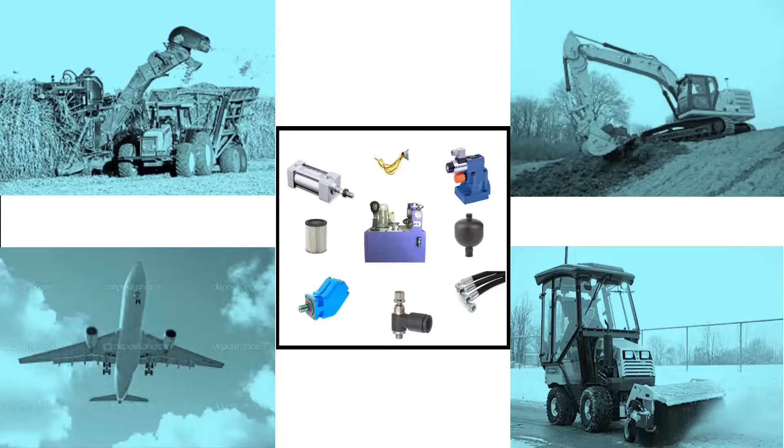Now we'll move on to the petroleum based fluid, mineral oils. It is the most commonly used hydraulic fluid and additives are an important ingredient in its makeup, giving petroleum oil characteristics which make it suitable for use with the hydraulic system. Basically, they possess most of the desirable characteristics. They are easily available and more economical. In addition, they offer the best lubrication ability, least corrosion problems, and are compatible with most seal materials.

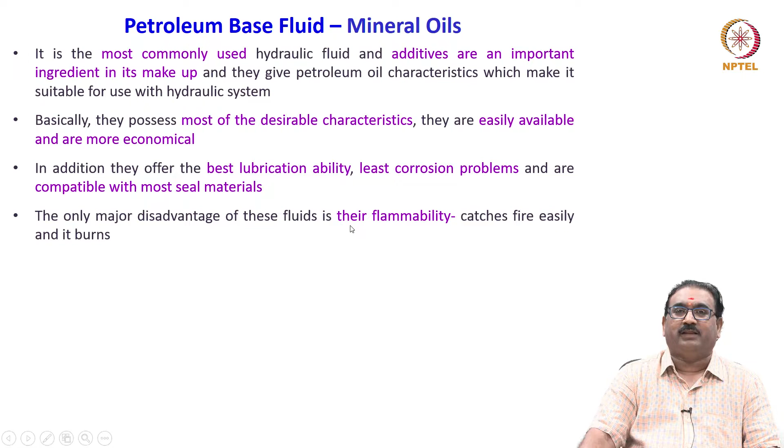The only major disadvantage of these fluids is their flammability, meaning it catches fire easily and burns out. They pose fire hazards mainly from leakages in high temperature environments. Petroleum based fluids are good for operating temperatures below 50 degree centigrade. At higher temperatures, these oils lose their chemical stability and form acids, varnishes, etc. All this leads to loss of lubrication characteristics, increased wear and tear, corrosion, and many other related problems.

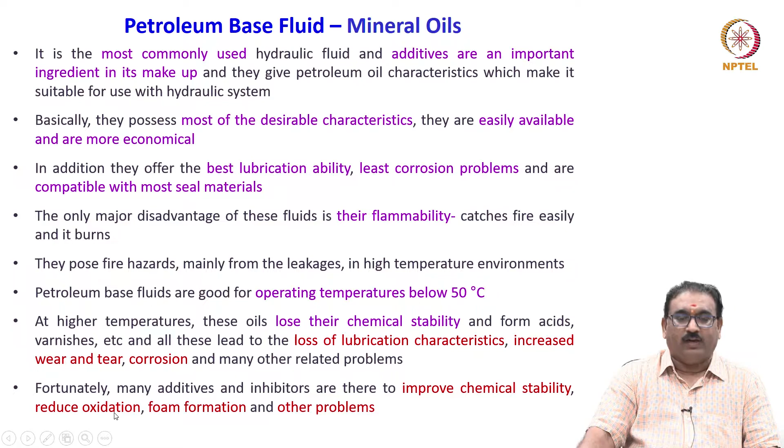Fortunately, many additives and inhibitors are there to improve the chemical stability, reduce oxidation, foam formation, and other problems.

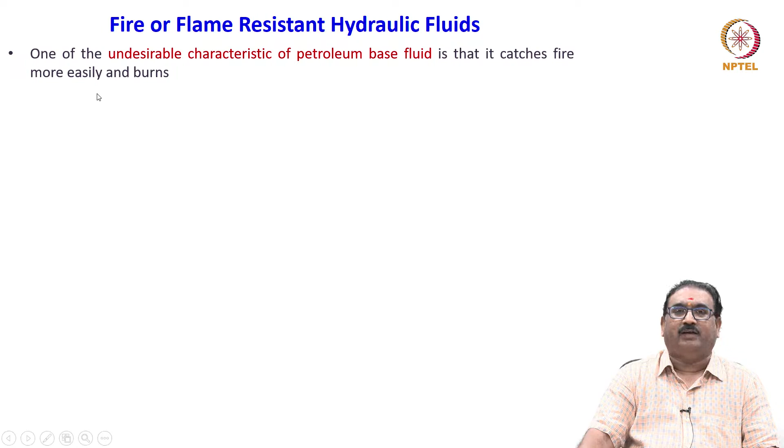Now, quickly we will see the fire or flame resistant hydraulic fluids. One of the undesirable characteristics of petroleum based fluid is that it catches fire more easily and burns. So an alternative fluid is fire resistant fluids. These fluids are high water content fluids, HWCF, and used when petroleum based hydraulic fluid may come in contact with a source of ignition or a flame or hot surface, as we have seen in machines like die casting, steel mills and presses.

These are specially formulated fluids that are more difficult to ignite and do not propagate a flame from an ignition source. Fire resistant should not be confused with fireproof, as fire resistant fluids will still ignite and burn given specific conditions. So they are designed to replace anti-wear mineral oil based hydraulic fluids.

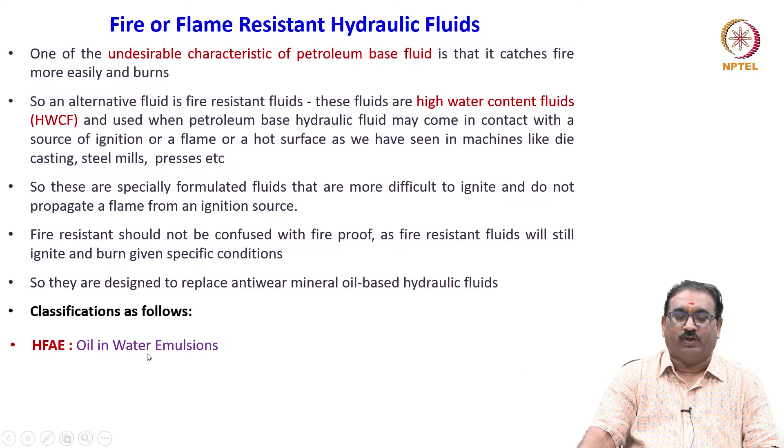Classification is as follows: HFAE, meaning oil in water emulsions. Water content is above 80% and is mixed with mineral oil or a soluble polyglycol based concentrate. So there is a risk of separation and microbe growth. Flame resistant can be used at temperatures between plus 5 degree centigrade to plus 55 degree centigrade.

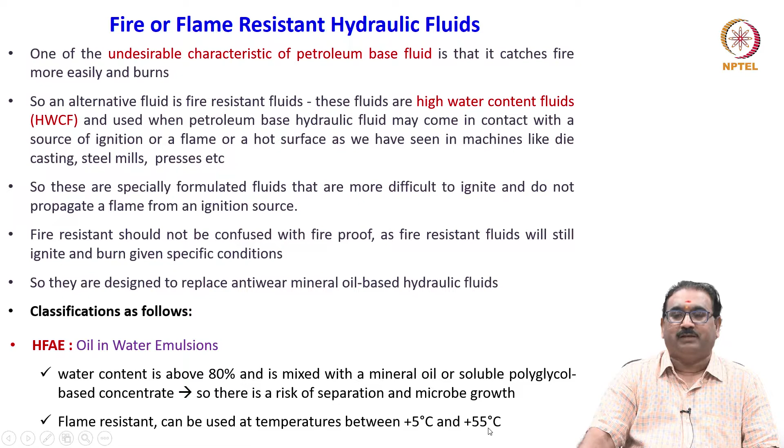HFAS, synthetic concentrates dissolved in water. No risk of separation since this is a true solution, which means the hydraulic components are considerably more susceptible to corrosion.

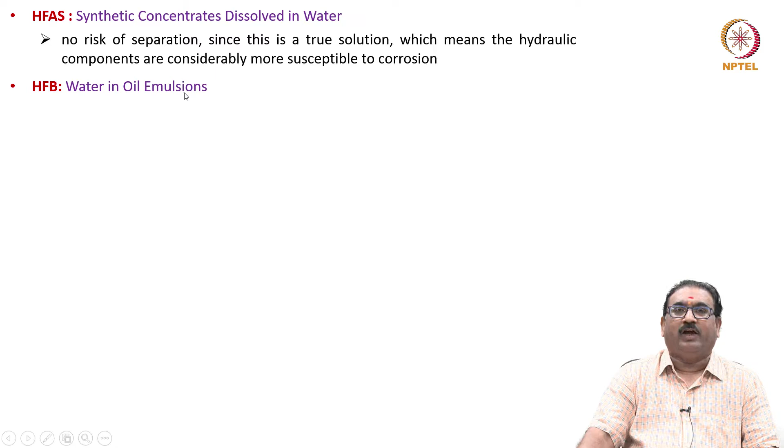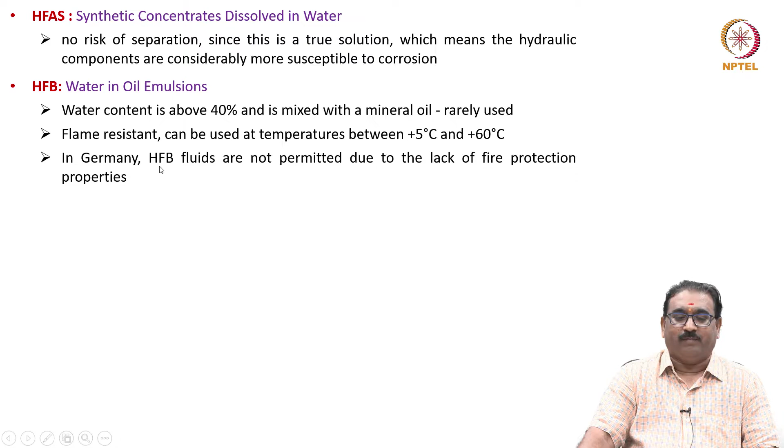HFB, the water in oil emulsions. Water content is above 40%, mixed with mineral oil, rarely used. This is flame resistant, can be used at a temperature between plus 5 degree centigrade to plus 60 degree centigrade. In Germany, HFB fluids are not permitted due to the lack of fire protection properties.

HFC, water glycols. Water content is more than 35% in a polymer solution. Flame resistant, can be used at a temperature between minus 20 degree centigrade to plus 60 degree centigrade. Can be used at a pressure of 250 bar.

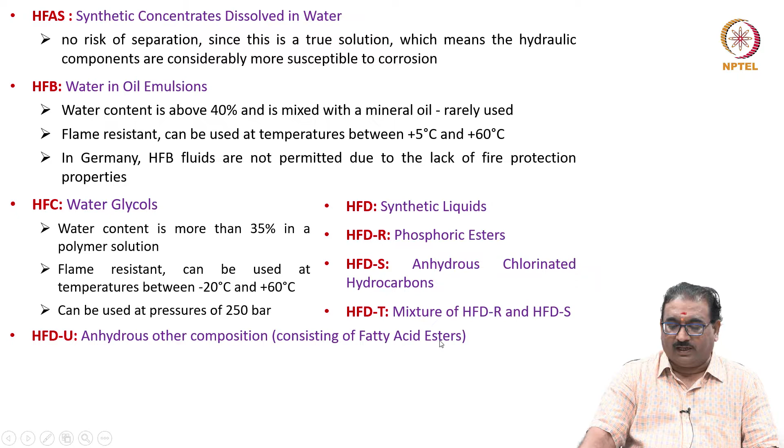HFD, synthetic liquids. HFDR, meaning phosphoric esters. HFDS, anhydrous chlorinated hydrocarbons. HFDT, mixture of HFDR and HFDS. HFDU, the anhydrous other composition consisting of fatty acid esters.

Synthetic liquids have a higher density than mineral oil or water, not HFDU. They can cause problems with the suction performance of pumps and affect a lot of gasket materials. Flame resistant can be used at a temperature between minus 20 to plus 150 degree centigrade.

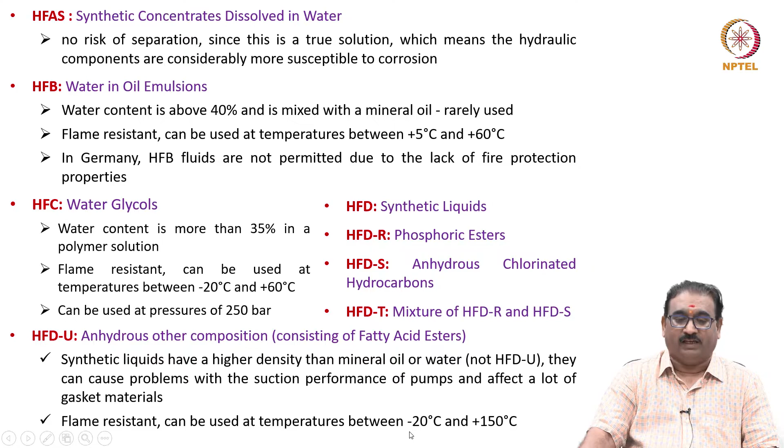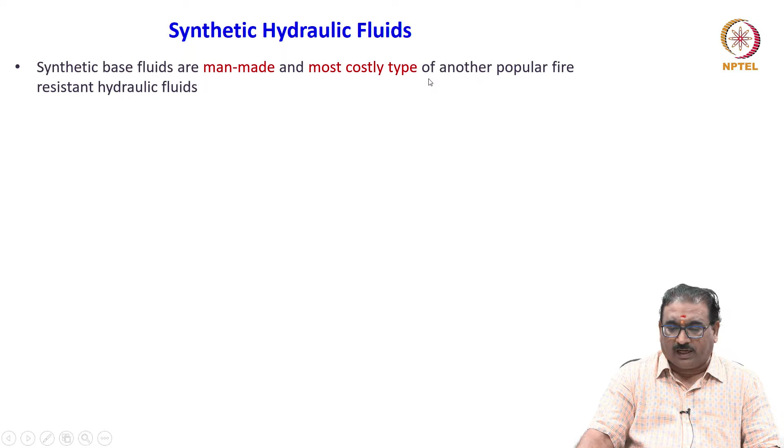Quickly we will see some of the synthetic fluids. Synthetic base fluids are man-made and the most costly type of another popular fire resistant hydraulic fluids. They usually consist of phosphate esters, chlorinated hydrocarbons, or a blend of the two along with petroleum fractions.

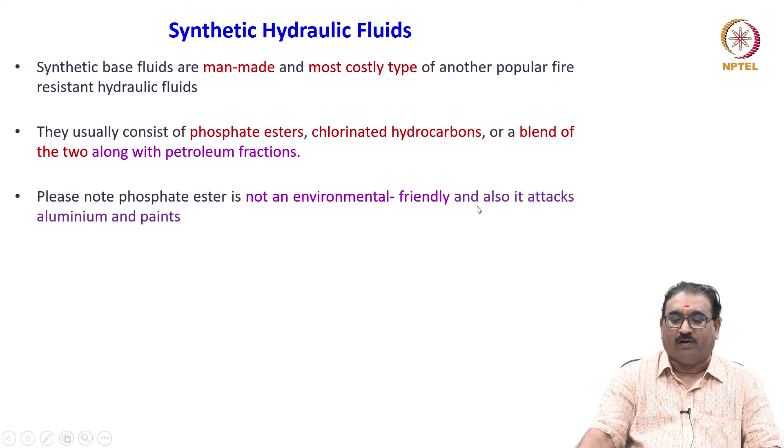Please note, phosphate ester is not environmentally friendly and also it attacks aluminum and paints. This type of synthetic fluid is more suitable for high temperature applications since it exhibits good viscosity and lubrication characteristics. It is not suitable for low temperature applications and not compatible with common sealing materials such as nitrile, requiring a seal made of special materials like Viton, which is an expensive material.

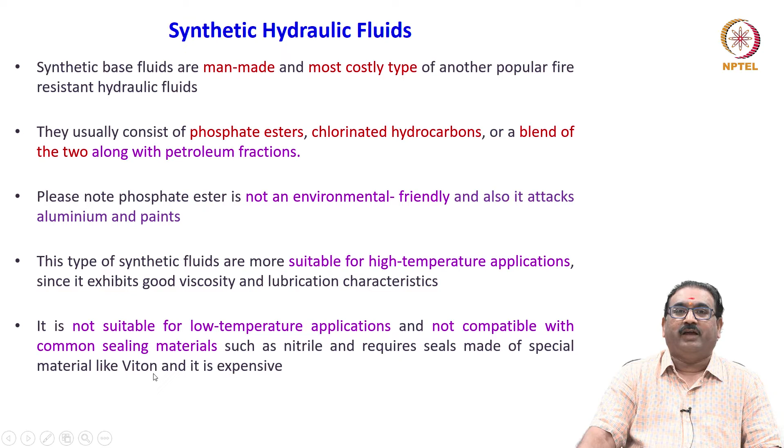Now we will see the biodegradable or bio-based hydraulic fluids. As more and more organizations are understanding their social responsibility, they are now turning towards eco-friendly fluids in their hydraulic machines. Hence, these biodegradable hydraulic fluids are non-toxic, biodegradable, ashless, anti-wear hydraulic fluids formulated using a readily renewable biobase.

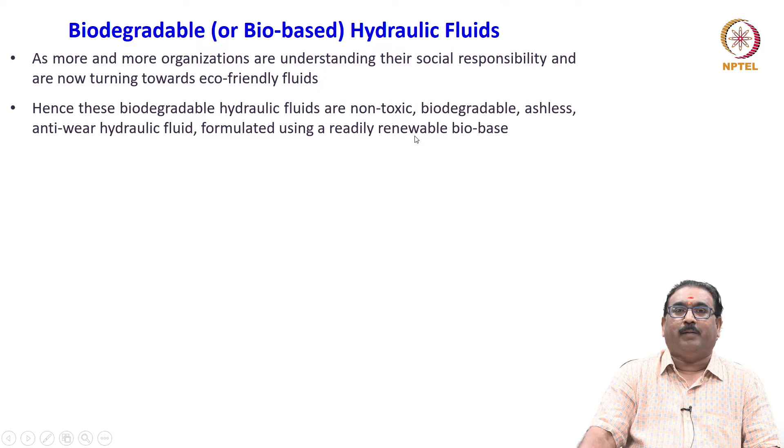Manufactured using plant oils, rapeseed oil, sunflower, soybean and many more, and used in biologically critical environments like construction machinery in water protection areas, snow grooming equipment in mountains, etc.

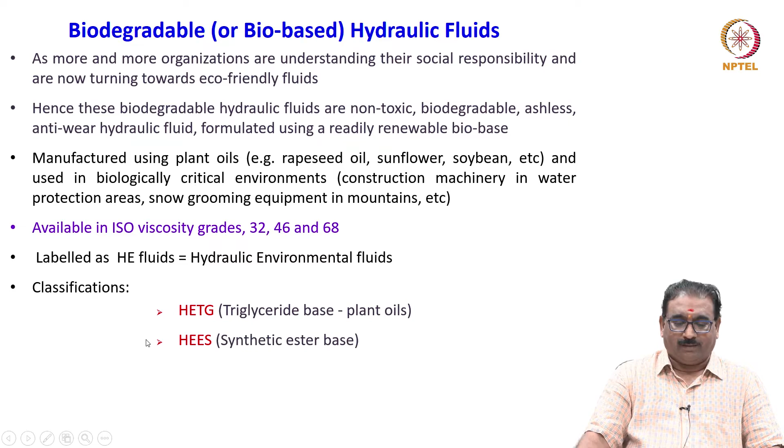Available in ISO viscosity grades 32, 46 and 68. Labeled as HE fluids, meaning hydraulic environmental fluids. Classification here: HETG, meaning triglyceride base plant oils; HEES, synthetic ester base; HEPG, polyglycol base; HEPR, other base liquids, primarily polyalpha olefins.

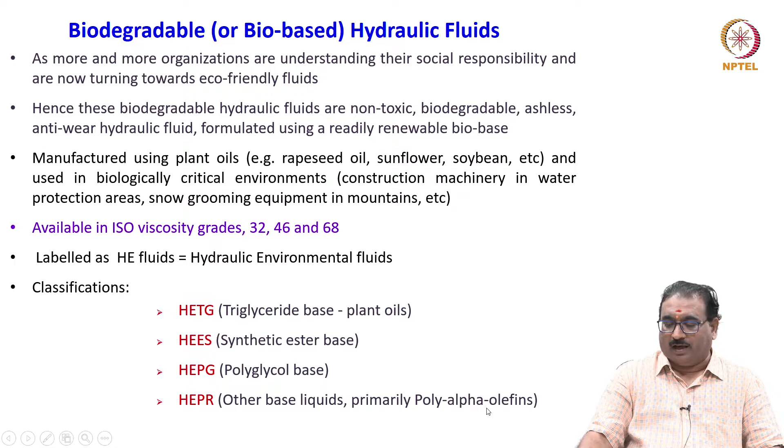Now we will see some factors influencing the selection of hydraulic fluids. Two factors are of primary importance in selecting a hydraulic fluid. First is compatibility with seal and bearings, very important it is. Second, the physical properties, primarily the viscosity. These are the two primary important properties while selecting the hydraulic fluids.

There are many more, I will list them all in the next slide, but you will see seal and seal materials are playing a major role. The table shows the different types of seal and bearing materials and fluid compatibility.

You will see here, I am showing the table here. There are different material and type, temperature range, fluid compatibility, because different types of fluids are there, as you have seen: air, petroleum based, water based, phosphate ester, many are there. And application also I have told you, seals and bearing materials.

You will see here, first material nitrile, elastomer it is, temperature range is -4 to 122 degree centigrade. Here air, petroleum based or water based, they are for the seals. Similarly, you will see fluorocarbon Viton, elastomer, -1 to 230, air, petroleum based, water based, then phosphate ester, seals. Like this you will see many are there.

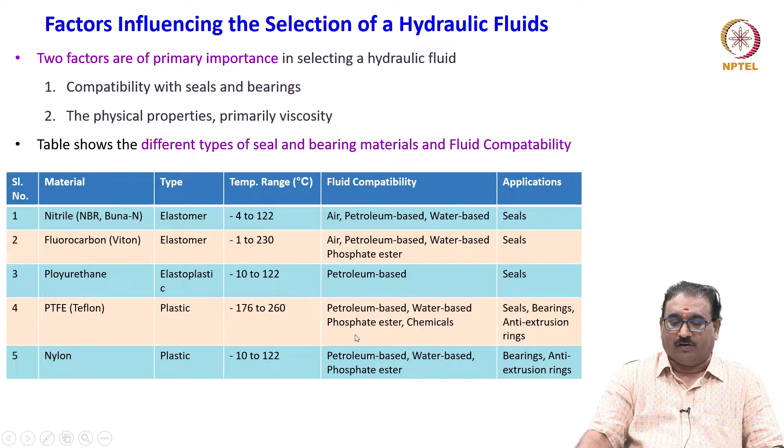For example, nylon, material type is plastic, -10 to 122, petroleum based, water based and phosphate ester. Here for the application for the bearings, anti-extrusion rings. This table will show you the different types of seal and bearing materials affecting the selection of fluid compatibility and temperature ranges.

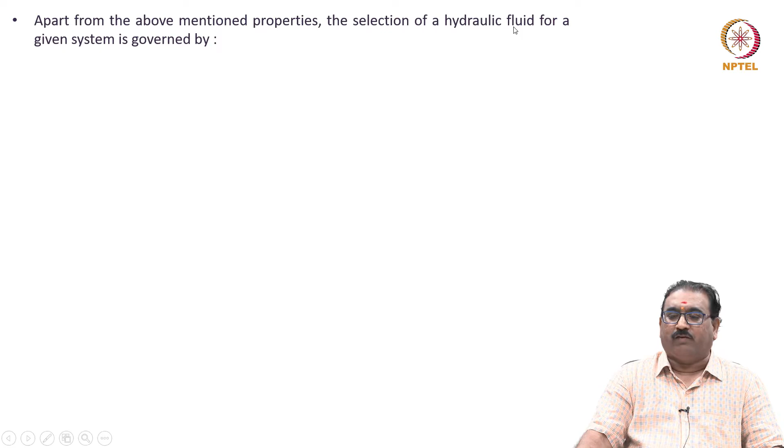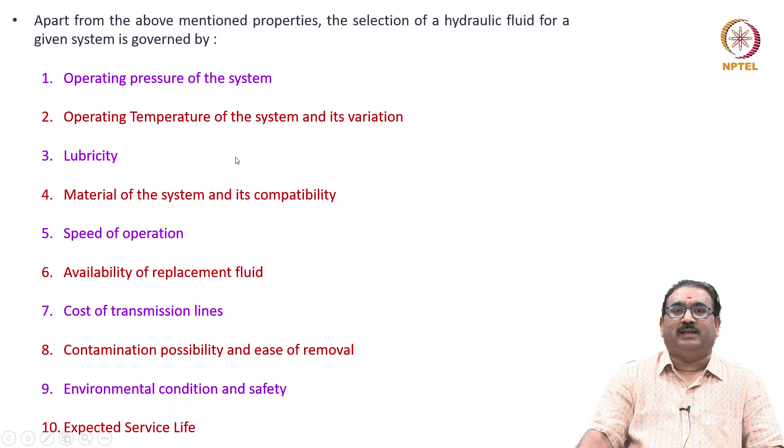Apart from the above mentioned two properties, the selection of hydraulic fluid for a given system is governed by operating pressure of the system, operating temperature of the system and its variation, lubricity, material of the system and its compatibility, speed of operation, availability of replacement fluids, cost of transmission lines, contamination possibility and ease of removal during maintenance work, environmental condition and safety issues, and expected service life. These are also very important while selecting hydraulic fluids for various applications.

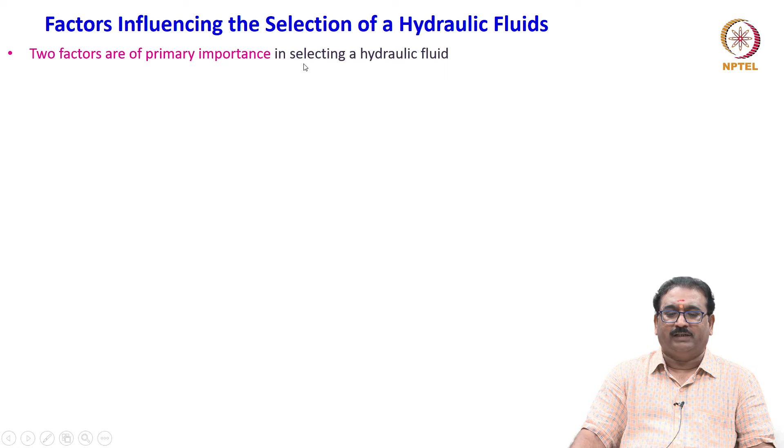Now let us see the factors influencing the selection of hydraulic fluids. Two factors are of primary importance, along with many other parameters. The first is compatibility with seals and bearings. The second is physical properties, primarily viscosity.

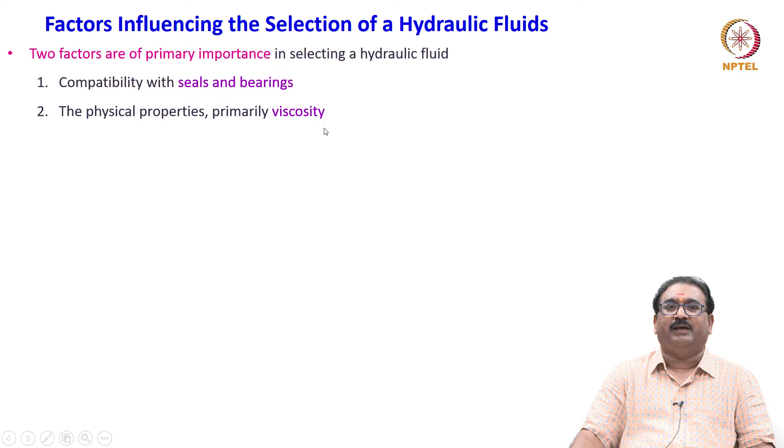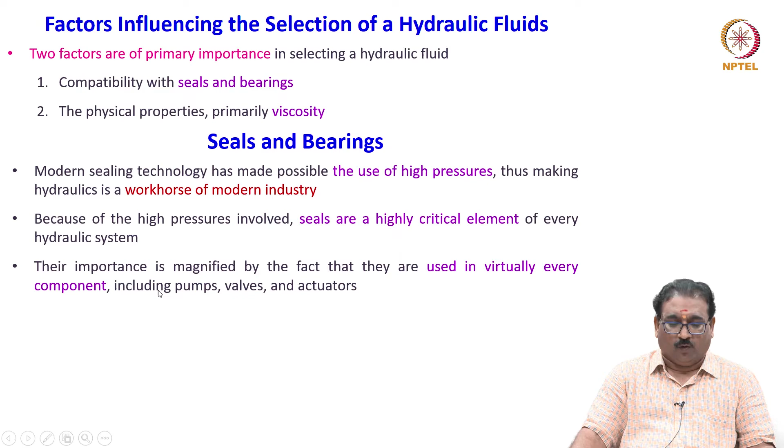Let us see seals and bearings. Modern sealing technology has made possible the use of high pressures, making hydraulics the workhorse of modern industry. Because of the high pressures involved, seals are a highly critical element of every hydraulic system. Their importance is magnified by the fact that they are used in virtually every component, including pumps, valves and actuators. Seal failure in any one of these components can cause severe performance degradation. Seals can be divided into two broad categories: static seals and dynamic seals. Static seals provide a seal between surfaces that are not moving relative to one another, while dynamic seals provide a seal between moving surfaces.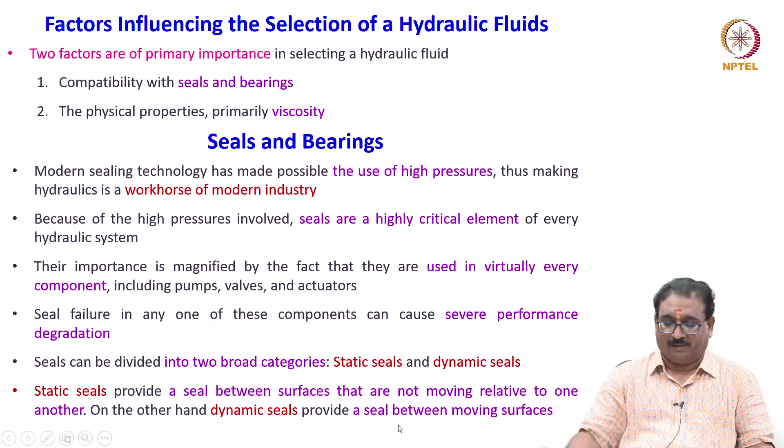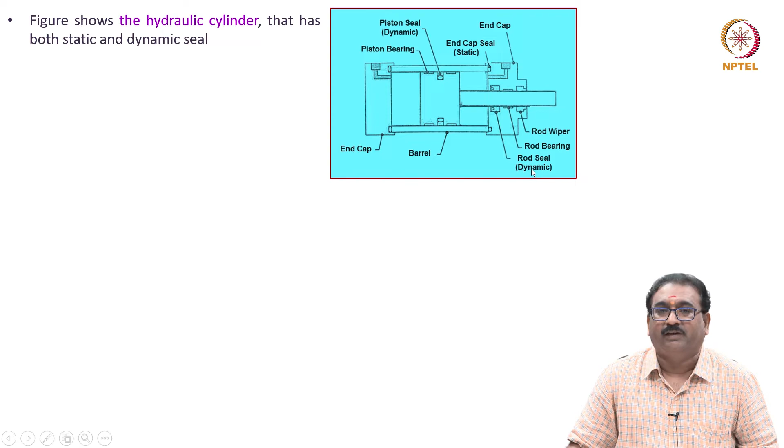Here the figure shows a hydraulic cylinder that has both static and dynamic seals. You will see here a double acting cylinder with a barrel and end caps. The piston seals are dynamic, since they are moving, and piston bearings are here, very important, which are affected by the oil properties. The barrel and end cap seals are static, and here you will see the rod seals, which are dynamic, and the rod wipers. There are many seals here.

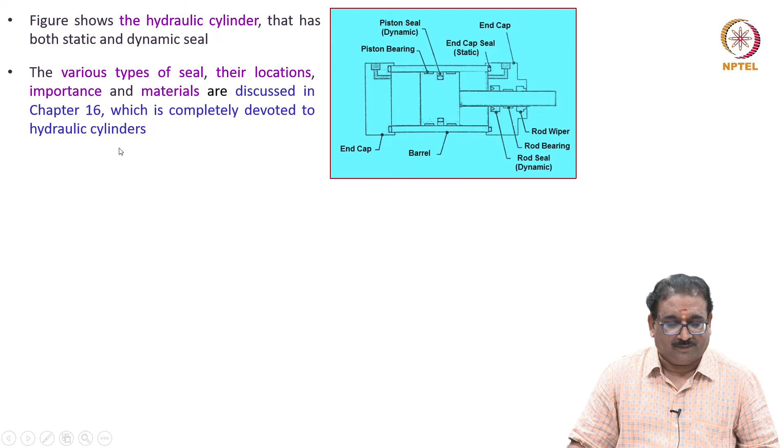The various types of seals and their locations, importance and materials are discussed in chapter 16, which is completely devoted to hydraulic cylinders. Please recap chapter 16 for more information on seals. Some commonly used seals in hydraulic cylinders, as I have told you, are O-ring seals, piston seals, wear bands, wiper seals, cartridge and backup rod seals, and many more. These are used to reduce leakage. Wherever moving parts or clearances are present, seals are essential to reduce pressure drop along with leakages.

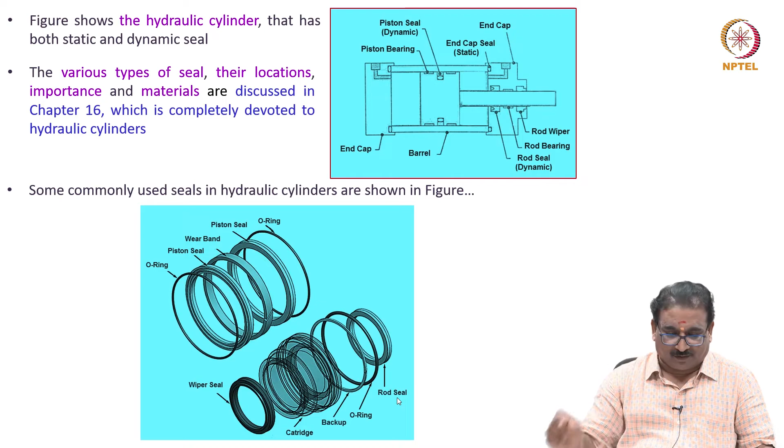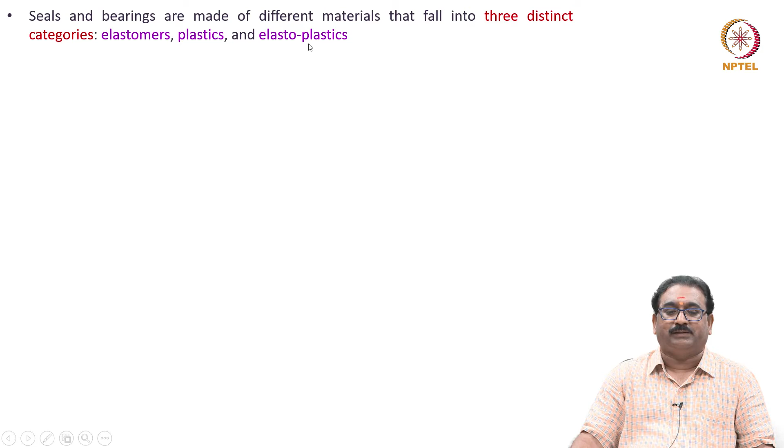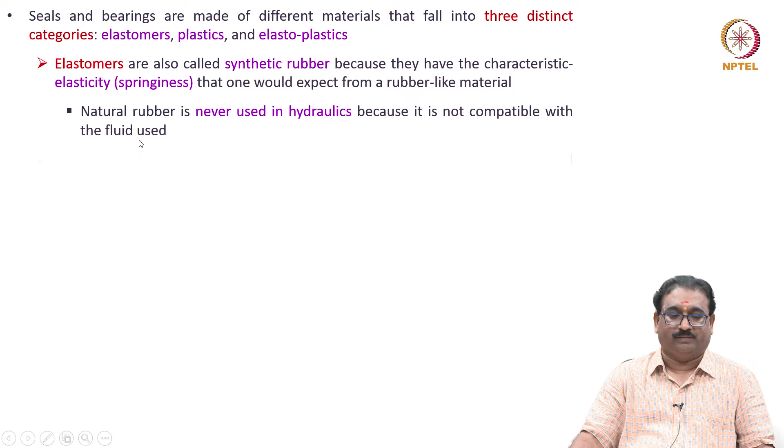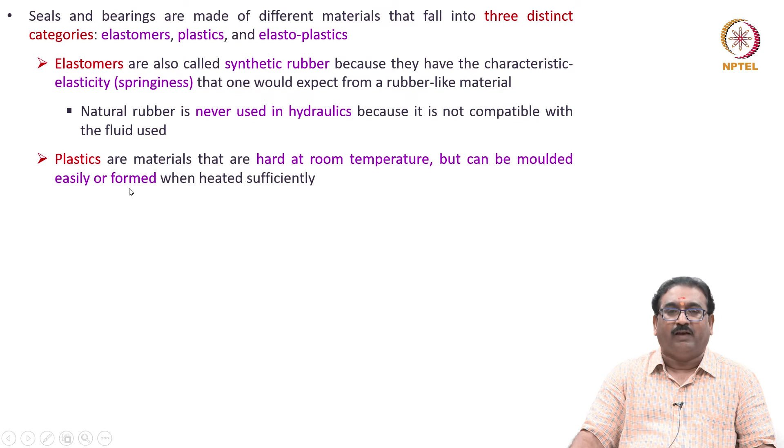Seals and bearings are made of different materials that fall into three distinct categories: elastomers, plastics and elastoplastics. Elastomers are also called synthetic rubber because they have the characteristic elasticity or springiness one would expect from a rubber-like material. Natural rubber is never used in hydraulics because it is not compatible with the fluid used. Plastics are materials that are harder at room temperature but can be molded or formed easily when heated sufficiently. Elastoplastics are softer than plastics but harder and stronger than elastomers.

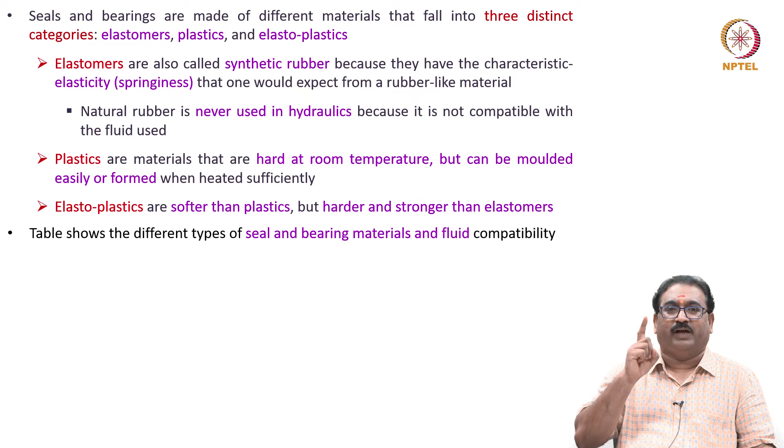Now the table shows the different types of seal and bearing materials and their fluid compatibility. This is why, when selecting the fluid, the seal and bearing material plays a major role in enhancing the performance of the hydraulic system. The table shows material, type, temperature range, fluid compatibility and applications. You will see various materials here: nitrile, NBR and buna. The type is elastomer, temperature range is -4 to 122 degrees centigrade, and fluid compatibility includes air, petroleum based fluids, or water based fluids. This is for the seals.

Then fluorocarbon, an elastomer, with temperature range -1 to 230 degrees centigrade. Here you may use air, petroleum based fluids, water based fluids, or phosphate ester, again used for seals. Then polyurethane, an elasto-plastic, -10 to 122 degrees centigrade, petroleum based fluids, used for seals. Then PTFE, or Teflon, a plastic type, -176 to 260 degrees centigrade, compatible with petroleum, water based, phosphate ester, and chemicals, used for seals, bearings, and anti-extrusion rings.

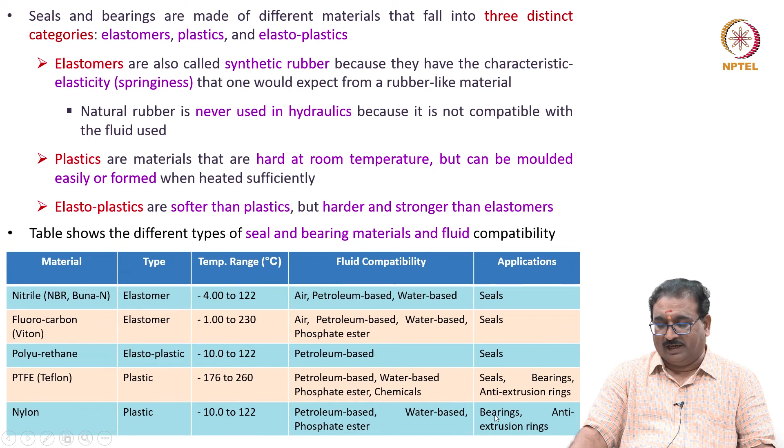Similarly, nylon is again a plastic, with temperature range -10 to 122 degrees centigrade, compatible with petroleum based, water based, and phosphate ester fluids. Again it is used for bearings and anti-extrusion rings.

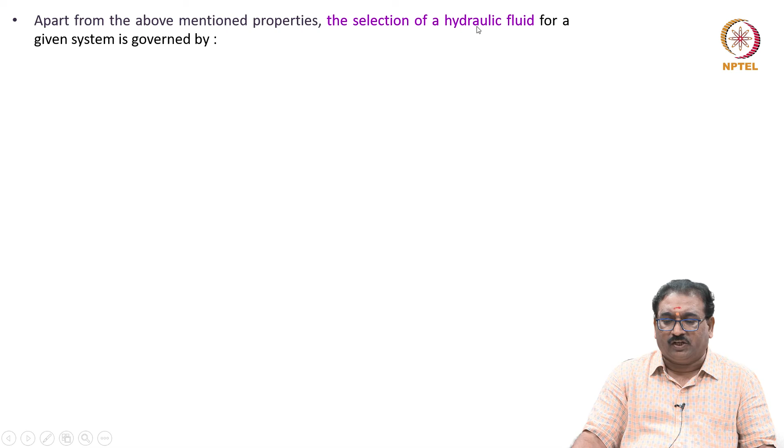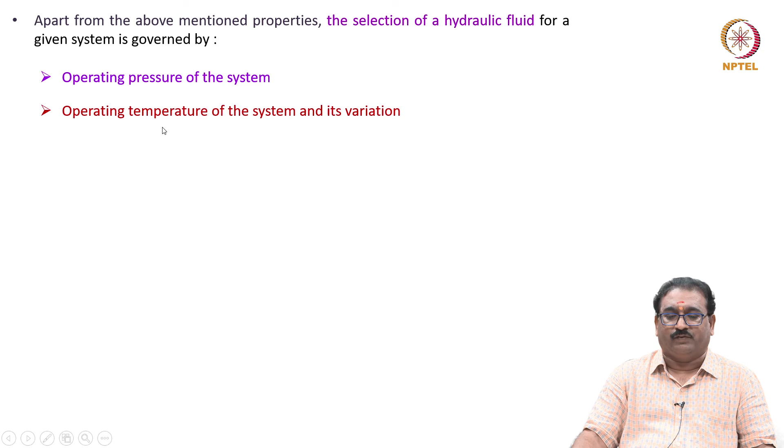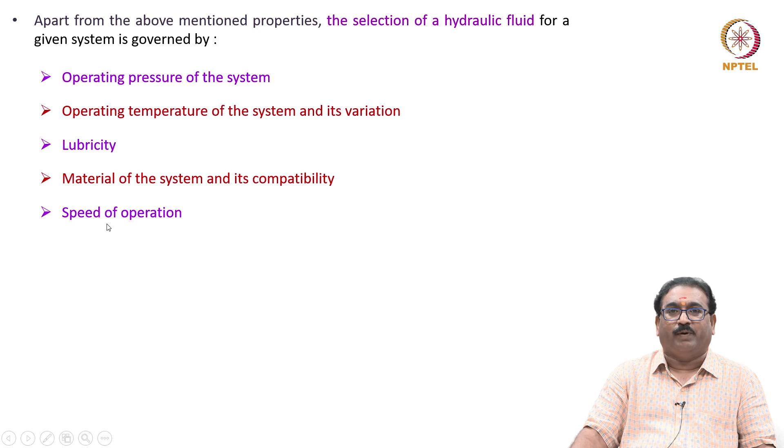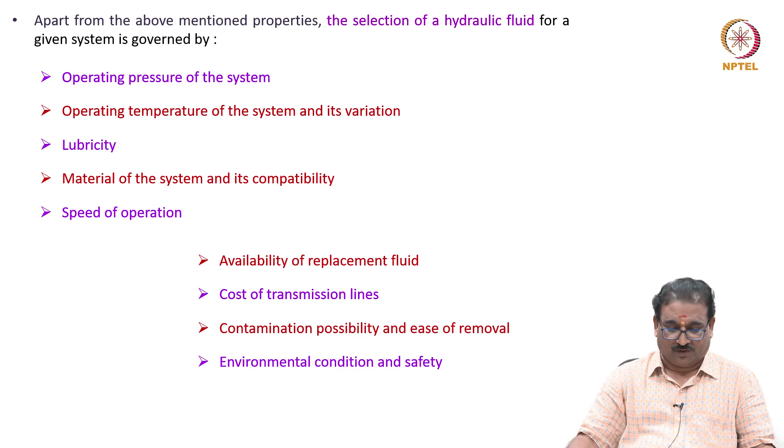Apart from the above mentioned properties, the selection of the hydraulic fluid for a given system is governed by other parameters like operating pressure of the system, whether it is a low, medium or high pressure application, operating temperature of the system and its variation, lubricity, material of the system and its compatibility, speed of operation, availability of replacement fluid, cost of transmission or distribution lines, contamination possibility and ease of removal from the hydraulic fluids, environmental condition and safety, whether it is indoor or outdoor, high temperature or cold, all of which you have to consider while selecting hydraulic fluids. Then, the expected service life.